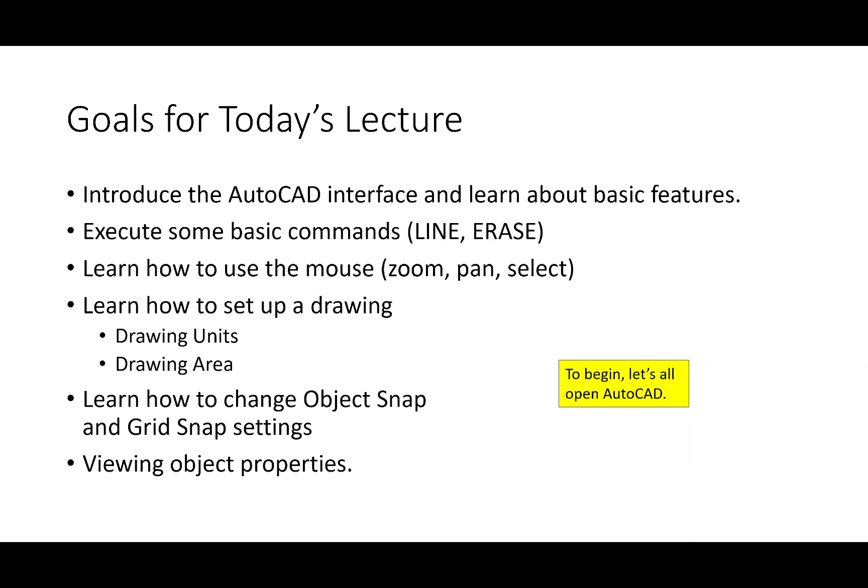So I'll say a few things here, and then I'll pull up AutoCAD. By the way, today I'm going to be hopping back and forth between the PowerPoint and AutoCAD itself, so I'll try and minimize that. I'm going to say a few things while you all have opened AutoCAD.

When you open AutoCAD, you should have this landing opening screen where you can create a new file, or see a list of all the files you've worked on before. If you've never opened AutoCAD before, there are about 3 sample files that show up with structural, mechanical, or assembly drawings. Those are just standard samples that come with the AutoCAD installation. As you work throughout the semester, you'll see all the files you work on. So why don't you go ahead and create a new file right now.

Just open it and click New. On Windows, you shouldn't really need to specify a specific type in that drop-down menu, but if you want, just make sure you select the one that says acad.dwt. That's just the standard template.

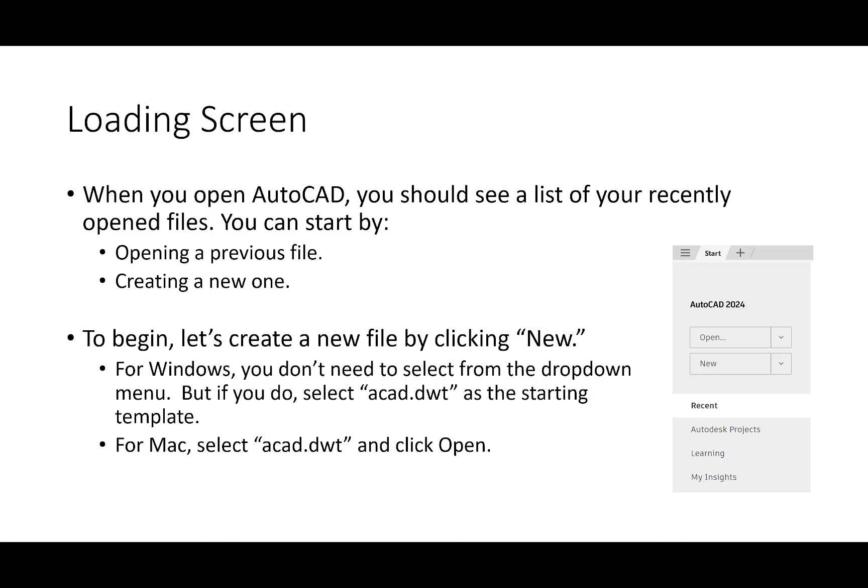I want to say a couple things about saving AutoCAD files, and this isn't really mentioned on the slide. I've taught this class before, and one of the tricky things is, sometimes it happens, you do have to save. That seems like an obvious thing to note, but these days a lot of the programs we use have autosave features where you don't need to think about it. For example, if you create Microsoft Office documents on OneDrive, you don't have to click save. It's like Google Docs, you don't have to save anything, it automatically does it. AutoCAD doesn't work that way. You have to actually save.

So if you're on an exam and I give you this big drawing to do, and you don't click save and you upload it, it's going to be empty, and I don't want that to happen. So please remember to click the save button. Save often during your work. I cannot stress that enough.

Now a little thing about the file structure in AutoCAD. Whenever you save a drawing, the drawing is what's called a DWG file, which stands for drawing. Whenever you save a drawing, if you open the folder on your computer, you'll see something like this drawing 07008, and an associated paired file called 07008.bak. AutoCAD automatically creates what's called a backup file. The way backup files work in AutoCAD is the backup is one save state prior to the drawing file.

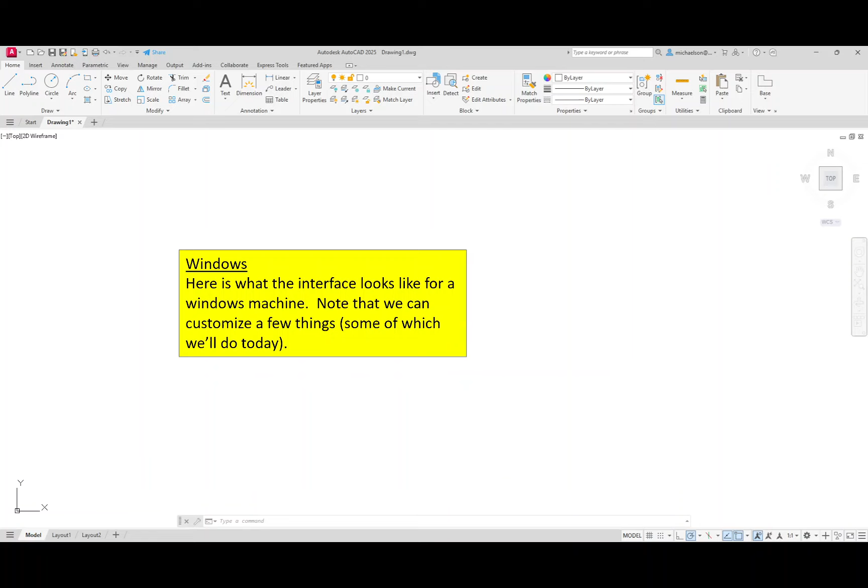The bulk of the commands are going to appear on the top of the screen. There's going to be a ribbon of commands, sort of like Word or Excel, where there's a tab with a series of commands. We're going to use that quite a bit. There's a command bar down at the bottom. You'll see a bunch of layout tabs and whatnot there on the bottom. This is what the Windows interface looks like.

The Mac interface looks like this. There's not a ribbon up top. Instead, there's a bunch of commands on the left and a bunch of commands on the right. The stuff on the right is related to layers and properties. The stuff on the left is really where all of your object creation commands and whatnot are.

So if you're operating via Mac, it should look something like this. Although you might have a dark theme on your screen and whatnot, it should kind of look like this. Does that make sense? Okay.

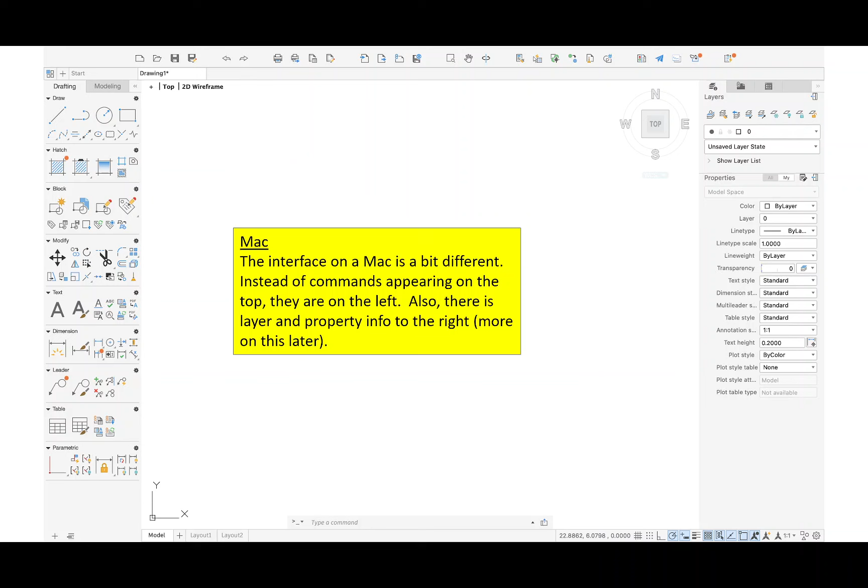Let me say a few things about the interface that's common, doesn't matter if you're operating Windows or Mac. The first thing I want to note is the command line. If you look at the bottom of the screen, you should see this rectangular bar where it should say something like 'type a command.' Does everybody see that? We're going to use that a lot this semester, okay?

The way AutoCAD works is that you execute commands to create a drawing. So what you'll do is say, I want to draw a line. You execute the line command, and you start drawing the line. Now, the way it works is you click the command bar, type the command, and press enter — but you shouldn't actually need to do that. If you literally just start typing right now, AutoCAD should recognize that you're trying to execute a command. For example, if you type the word 'line', you should see it pop up and recognize, oh, we're trying to draw a line here, okay?

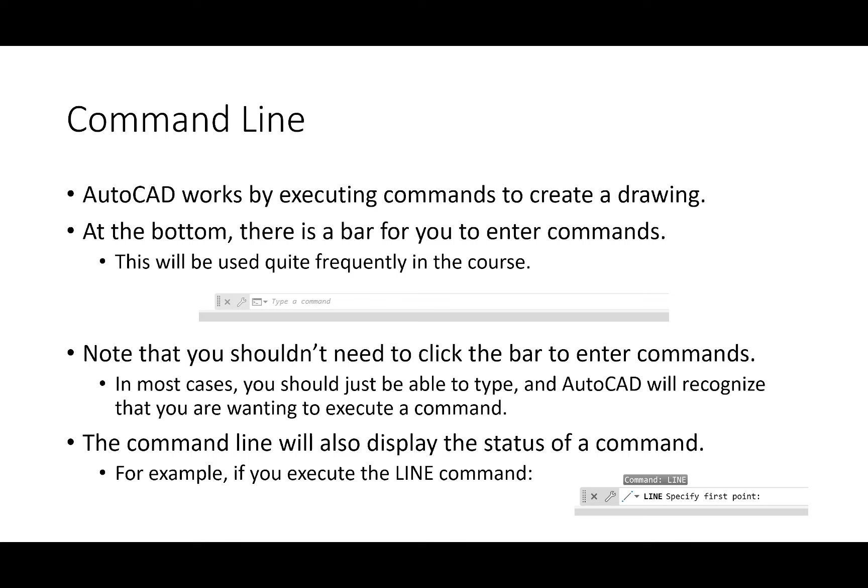We're going to do that here in a bit, but I just wanted to make the point on that. Okay, does everybody see on the bottom this 'Model' tab, and then there's 'Layout 1', 'Layout 2', does everybody see that? We're going to mess with that probably a little bit later in the semester if we have time. But those are referring to what are called model space and paper space.

To give you an idea, model space is where we're going to do the bulk of our work when using AutoCAD. So in model space, we're going to create the schematics and drawings for the given features. Paper space is a place where you can create printouts, okay? Now, I want to be crystal clear, you do not have to use paper space, and when we first start learning how to print, we're not going to. We're just going to print directly from model space.

The idea behind when you would use paper space is that if you have a bunch of stuff in model space — so you have one drawing — and from that one drawing file, you want to generate a bunch of sheets, right? So you would have a sheet, Layout 1, Layout 2, Layout 3. So a single drawing from which you're printing multiple sheets.

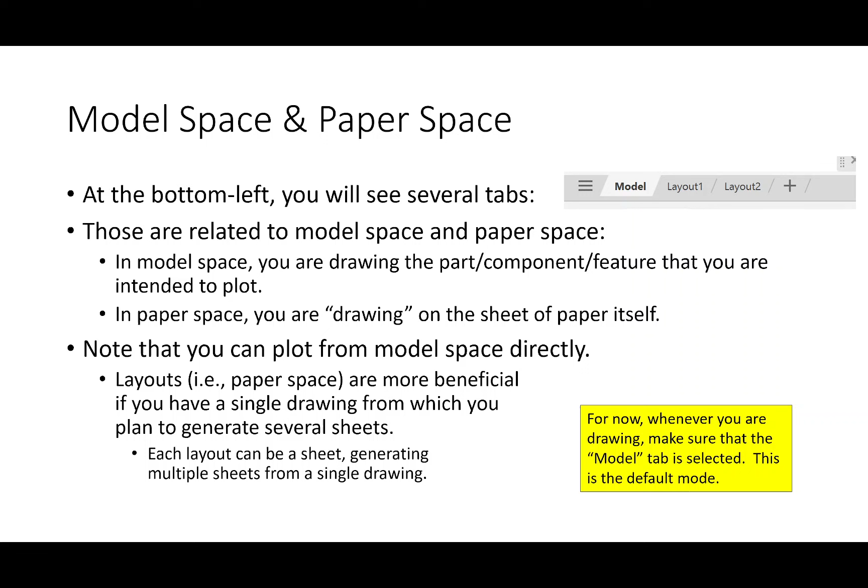That's where paper space really comes into play. We're not going to mess with that in the early part, but we might look at that a little bit later. For now, just make sure that whenever you're drawing, you're in model space, okay? You'll know when you're in paper space. It'll look different, and if you're in paper space, you're doing something wrong until I tell you otherwise.

All right, so let's talk about the drawing options and customizing the interface. We're going to mess with this a little bit later today, but this is the stuff on the bottom right, and Windows and Mac should see the same thing. This is the stuff where it says model, and it has these buttons and several features. We're going to dissect what each of those mean a little bit today, but everybody should see that. Understanding how these interface customization options work can save you a lot of time.

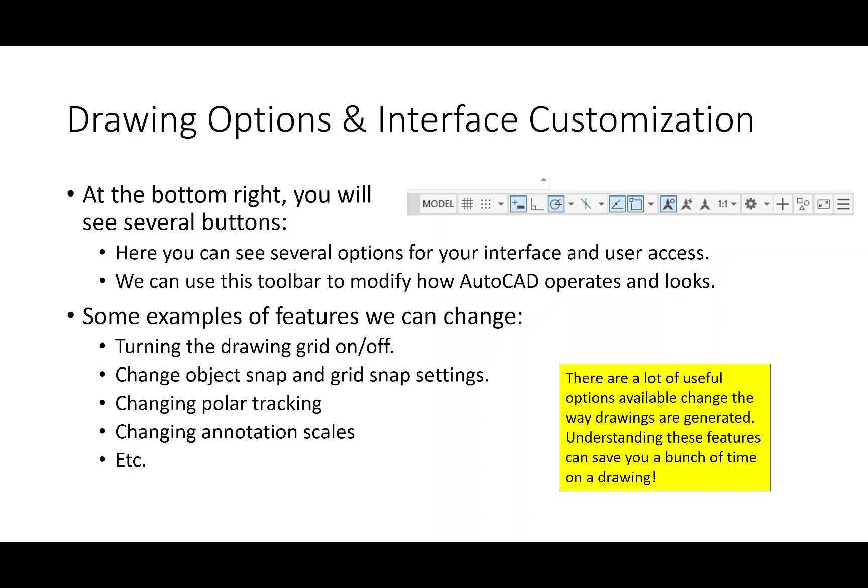For example, if you're trying to create a drawing at 1/4 of an inch increments, you can turn on grid snap at 1/4 inch increments, and now AutoCAD will automatically snap to that. You'll kind of see what that works like today.

One of the things I want to do is customize my interface a little bit, and I want to show coordinates. Let me show you how that works.

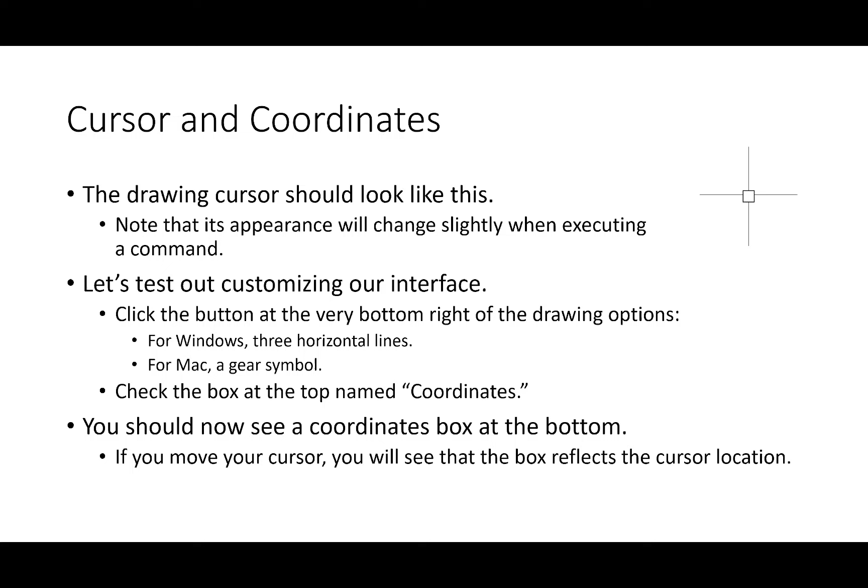Okay, so let's pull up AutoCAD here. Let me open up a new drawing. Okay, so here's my drawing. Actually, let me put me on the standard color scheme. Give me one second. Make it a little easier for everybody to see.

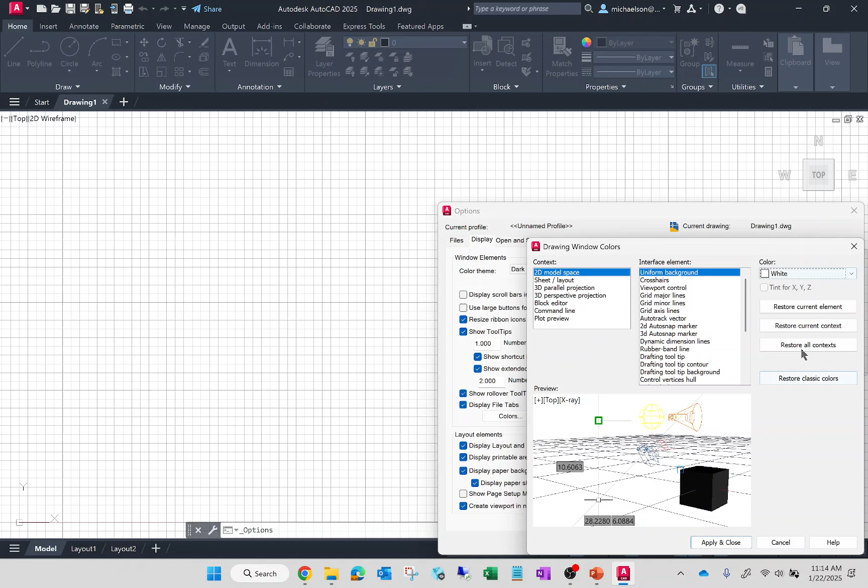Okay, if you look here at the very bottom, there should be these little three lines. I've heard computer programmers refer to that as a hamburger button because it looks like a hamburger. If you click that, there should be an option at the very top that says coordinates. I want you to make sure that that's checked. Now, if you've done that correctly, what you should see at the bottom now is this sort of readout.

See that thing at the bottom that has X, Y, and Z coordinates? As you move the cursor, see that? You can see the coordinates change. Does everybody see what I'm talking about? Here at the very bottom, we're talking about right here, this part right there. You can see the coordinates and whatnot pop up.

I want you to have that turned on throughout drawing. Trust me, when we start getting in the middle of creating our drawing, that's going to make life a little bit easier. You folks over here, I'm talking about this window right here. You're seeing that and did that correctly. So it's just one little thing that we can do to customize our interface. Sound good? Okay.

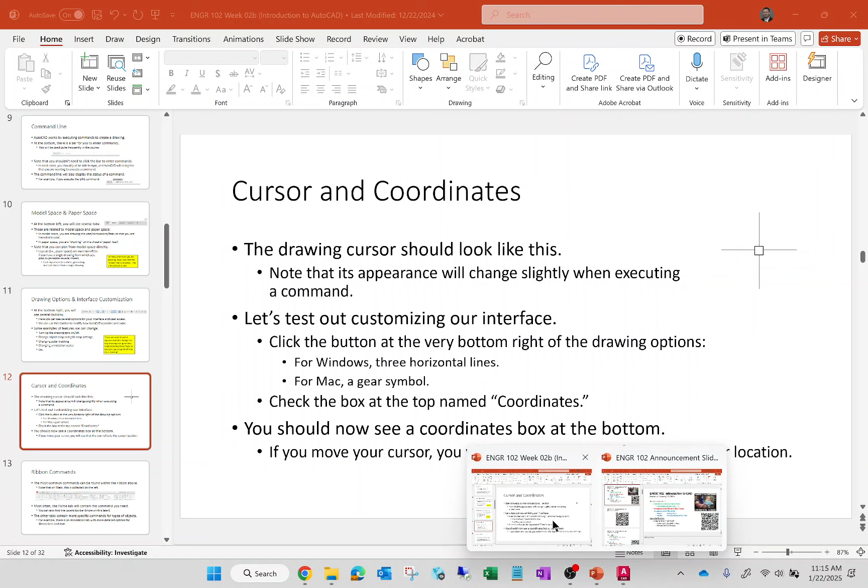So let's talk about the command. The ribbon on the very top contains the commands that we use to create objects in AutoCAD, like lines, circles, arcs, dimensions, and all this stuff. On Macs, these commands are collected on the left. For Windows, the Home tab, the very first tab, contains the vast majority of everything that you would need to create a drawing. It doesn't contain everything, so we'll need to do some annotations and use that tab, but for the Home tab, it should contain mostly everything.

For you folks using Mac, the stuff on the left contains the stuff in the Home tab. Macs are organized a little differently, and they actually are able to pack a lot more commands into a much smaller area.

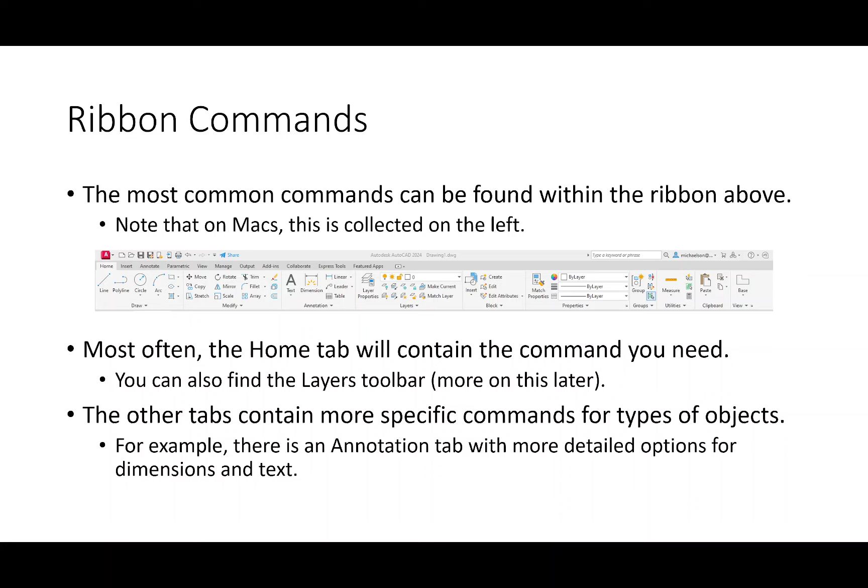But we'll use the Home tab and the Annotate tab. Those are probably going to be the two we use most frequently.

For you Mac folks, you really don't need to worry about this because this stuff already shows up. But if you look at the top left, there should be some icons for some basic commands, like new, open, save, save as, and all that.

One of the things I want you all to do is click the little drop-down arrow next to the share button, that icon that looks like a paper airplane. Next to that there's a drop-down arrow. If you click that, you should see an option that says Show Menu Bar. Click that, and then you can see the menu bar up top.

I really like having that visual because if there's any command that's not in the ribbon, chances are it's in the menu bar. So if we click that, now we can see File, Edit, and all that stuff. And again, for you Macs, you don't really need to do that because if you just hover to the top, you can see that it's there. Everybody good with that?

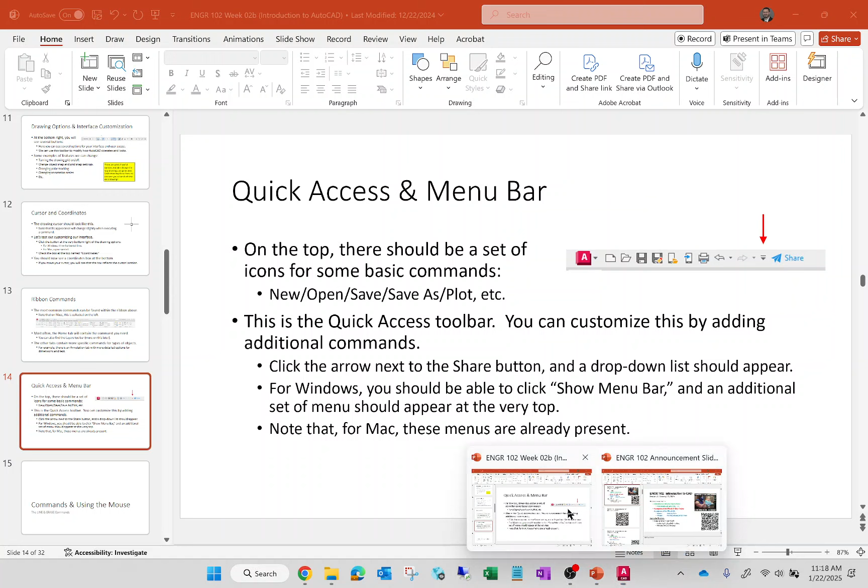All right, so we're getting to the good stuff here soon. I just want to make sure we're comfortable with the basics first. So let's get into some commands.

I want to make sure I throw some terminology out at you. We're going to be very terminology heavy, in terms of like, when I say objects in AutoCAD, it's going to have a very specific meaning. And I'm going to try and maintain that terminology throughout the semester. So if I get into definition land, that's why.

Throughout this semester and this lecture, I'm going to reference something called an object in AutoCAD. The best way I can describe objects is any feature in a drawing that can be plotted. By that I mean lines, circles, polylines, hatches, dimensions, text, annotation, all of that stuff. I say the term 'can be' does not mean 'must be.' There are plenty of objects we create in AutoCAD that we have no intention whatsoever to print. A good example of that is a construction line and whatnot.

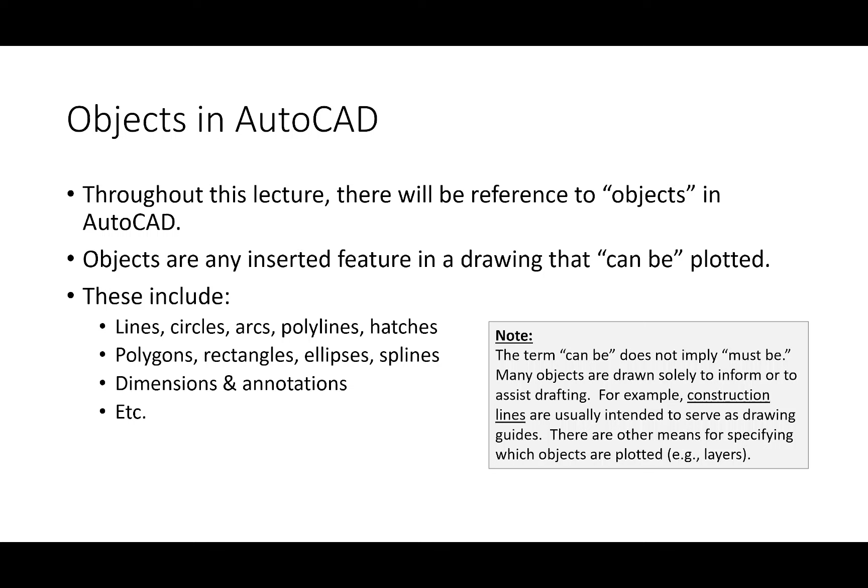The other thing we'll be able to do is create objects that we can turn on and off with what are called layers. We'll talk about layers in a couple weeks. But for now, if you need a definition for objects, that's what objects are.

Now, the way AutoCAD works is we generally have two modes of operation: navigation mode and command mode. Right now, everybody in here is in navigation mode, I think, where you're just sort of looking at the drawing, nothing's really running, but you can see what's going on. Whenever you execute a command, you'll know because you'll be typing out the command, the cursor will look a little different, and then you can start creating stuff.

So the idea is you'll execute a command, do a bunch of stuff, and then get out of that command to go back to navigation. You're either in navigation mode or command mode. If you're ever in command mode and you need to get out, press the escape key. The escape key is going to be your best friend this semester. You can hit it 150,000 times and you're never going to break AutoCAD. So if you're ever in the middle of a command and need to terminate it, hit the escape key.

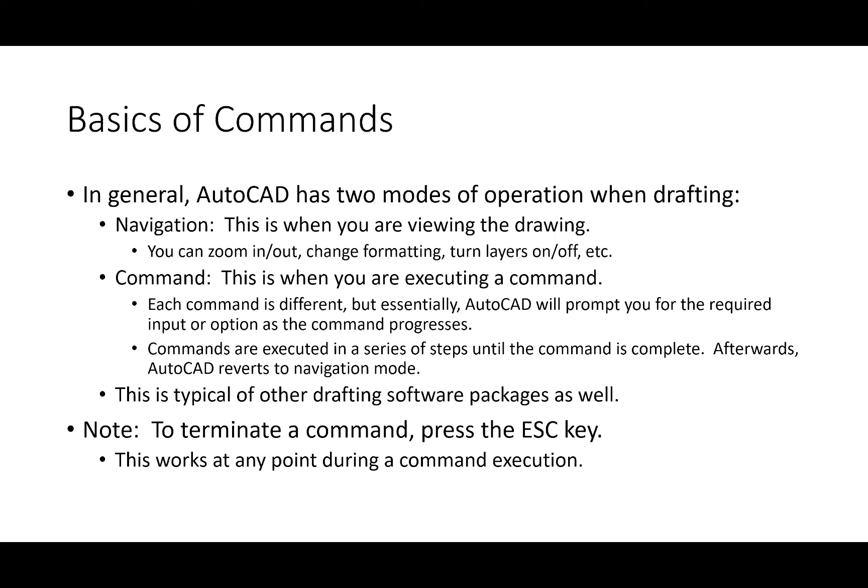Now the first command we are going to use is called the line command. I want to be clear right now, and we'll talk about this later, there is a difference between what's called a line and what's called a polyline. Now, we can do this a couple of different ways.

We can actually click the line button, or we can type out the command. I'm going to tell you right now, my preference is to type it out. Whenever I've worked in a professional setting doing this stuff, I found that drafters who are more efficient and can do things faster tend to just type the commands out as opposed to clicking them. So you can just type L and press enter and start drawing lines, whereas having to click the button actually takes more time. You might think I'm talking about a fraction of a second, but if you're working on a professional job, that stuff adds up.

Okay, so let's open up AutoCAD. Here's my interface, and I'm going to draw a line, or a series of lines. What I'm going to do is type the letter L and press enter, and you can see the cursor changed. You can tell you're in command mode because now the command bar at the bottom is asking you for some information. We're not going to specify any numerical data today, we're just going to play around with it a little bit. So I'm going to use the mouse and click a point. Specify first point, click right there.

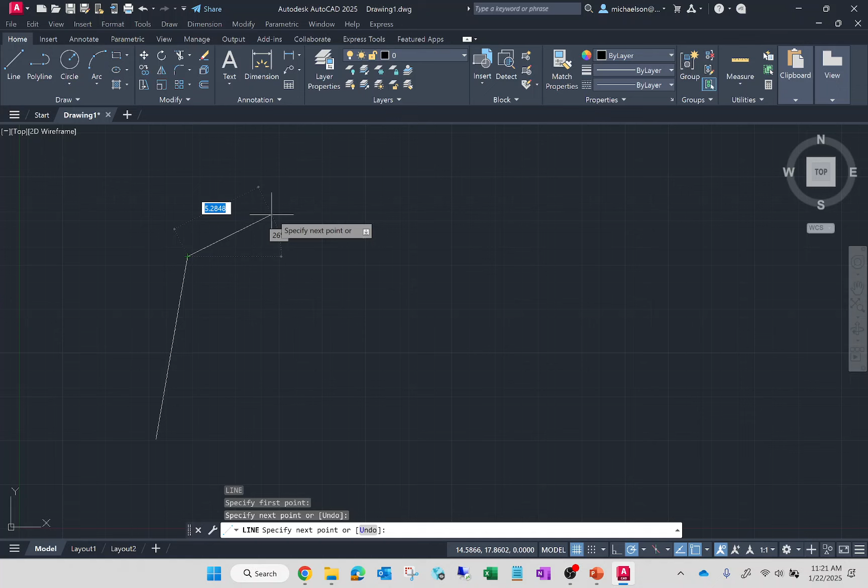Now you can see AutoCAD wants to start drawing a line. And as I click, it's drawing lines. So we can get kind of silly with it, okay?

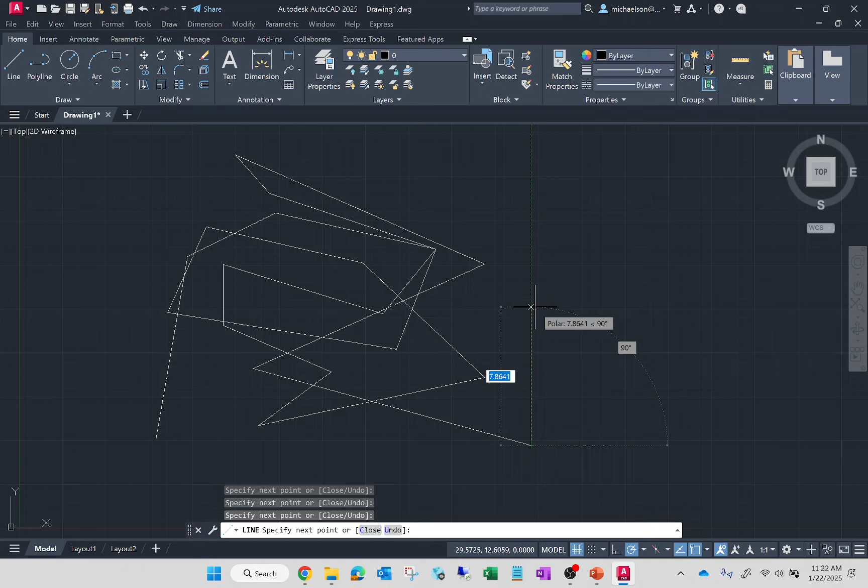One of the things you'll notice as you're drawing is there are a couple instances where AutoCAD's trying to help you along a little bit. For example, here I am drawing a line, and watch what happens as I try and draw a vertical - it goes, whoop, wait, you want to draw a vertical line. It's sort of helping you along. That's a polar tracking feature, and there are certain times where AutoCAD is trying to help you out. I didn't want that to concern you.

But we're just going to draw a few lines, and when we're done, you can hit the escape button to close out, or if you look at the bottom of the command bar, it says you can type the letter C or type close and press enter. Any of those will work. So I'm just going to hit escape, and boom, there's my line.

So the first thing I want to do before we move on is make sure everybody in here was able to do that. Is there anybody in here that was not able to draw some lines? Excellent, okay, that's what I want to hear.

Okay, so again, we will discuss the difference between lines and polylines later. The short answer is that I drew about 20 lines - AutoCAD thinks of those as 20 objects. A polyline, AutoCAD would think of that as one object. But we'll talk about that a little bit later.

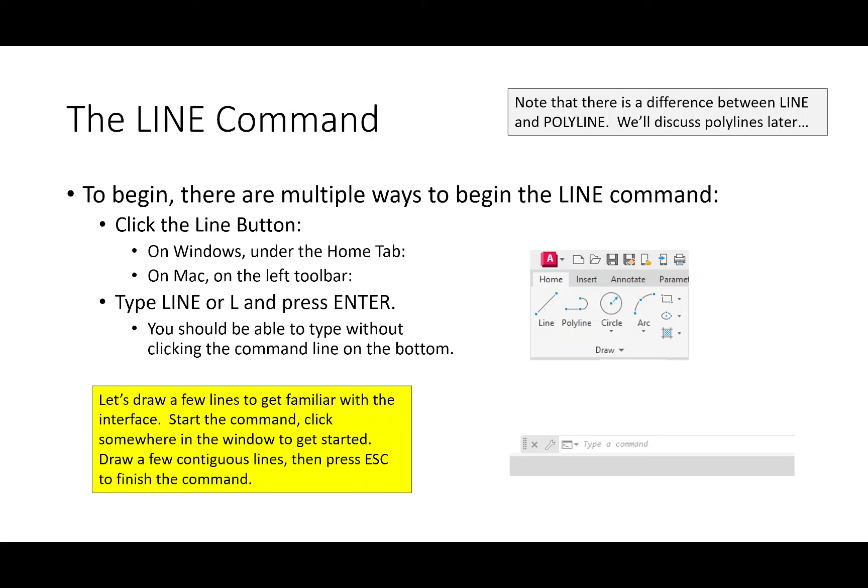Okay, so a couple things that you'll notice when you're drawing lines. As you draw, there should be some dynamic input that displays - things like the angles should display or the distances should display. AutoCAD is again trying to help you out.

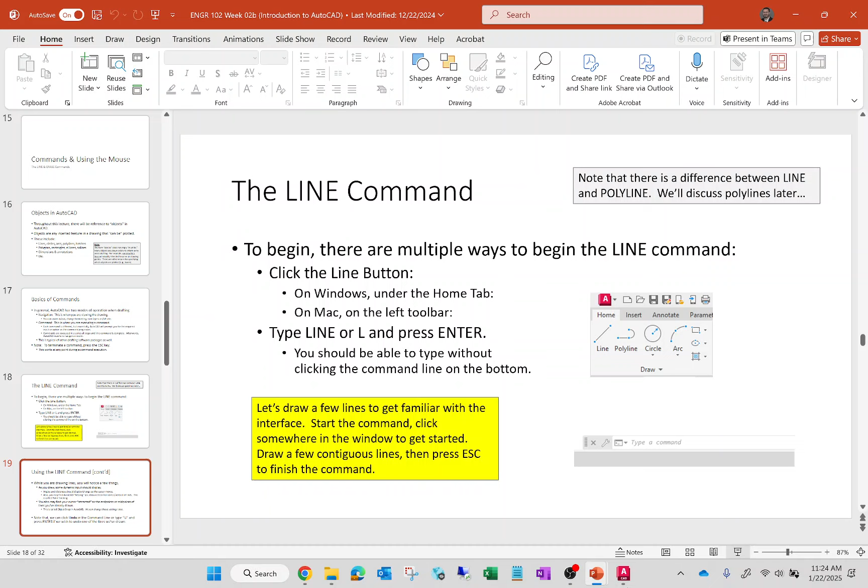One thing I didn't mention is that you might find your cursor attracted to certain geometric features you've already drawn. Let me show you that here in AutoCAD. For example, if I'm drawing a line, and I get my cursor close to here, you can see this little square pop up - it's trying to connect to the endpoint of a line I've already created. That's called an object snap. I'll talk about that a little bit later. That's entirely normal, and those are features we can change in terms of how AutoCAD operates. Everybody good? Okay.

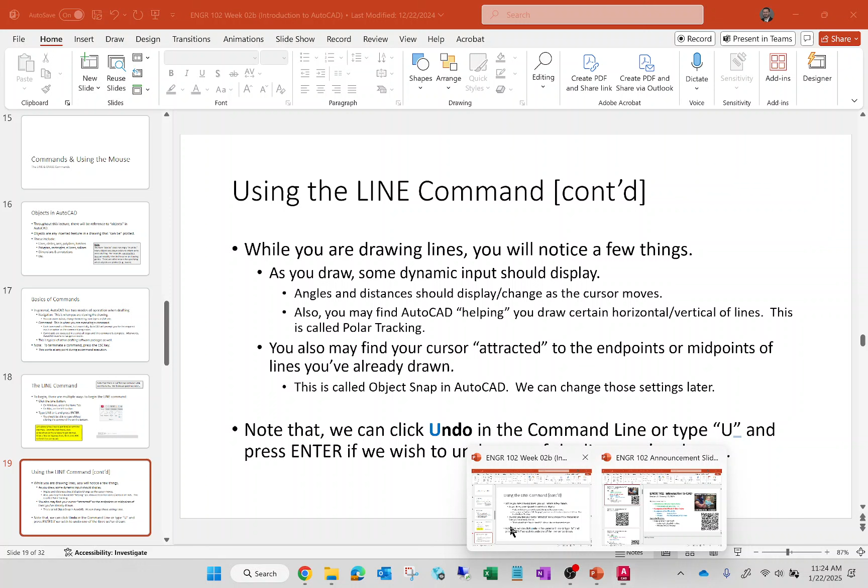And again, when you're drawing a bunch of lines, you can type the letter U in the command line and press enter to undo one of the lines that you've drawn. So if you drew 6 lines and line number 6 is wrong, just type U and press enter, and it'll get rid of that 6th line, and then you can redraw it. Sound good?

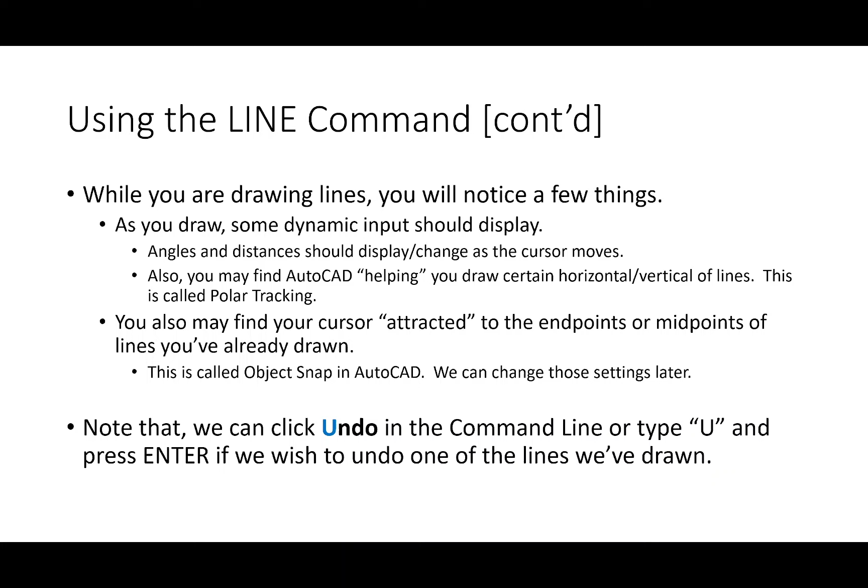All right, let's talk about using the mouse. The mouse really does make your life a lot easier. Some of you are already playing around with it, and that's totally fine, okay? So I want to say a little bit about what the different buttons of your mouse can do.

So let's talk about the left button. The left button can be used to select objects. You can single click an object to select it. You can single click away from an object to generate a window, or you can press and hold for a lasso. I'll show you what I mean there. So for example, I can click an object to select it.

I can drag a window, and some of you are probably wondering why the window is either green or blue. I can also click and hold and get this sort of lasso thing. I'll talk about that later. But that's what the left button is for.

The right button is pretty self-explanatory. If you right-click, it brings down a menu with additional options and whatnot. That's what the right button is for.

But what about the mouse wheel? The mouse wheel will allow you to zoom in and out. The way it works is it will zoom in and out, and the center of that zoom, the way AutoCAD is zooming, is a function of where your cursor is.

For example, here's my drawing. If I place my cursor right here in the middle and zoom in, you can see that's where it's zooming. But if I place my cursor all the way over here and zoom, it's zooming over there. Does that make sense? So where the cursor is affects where the zoom is.

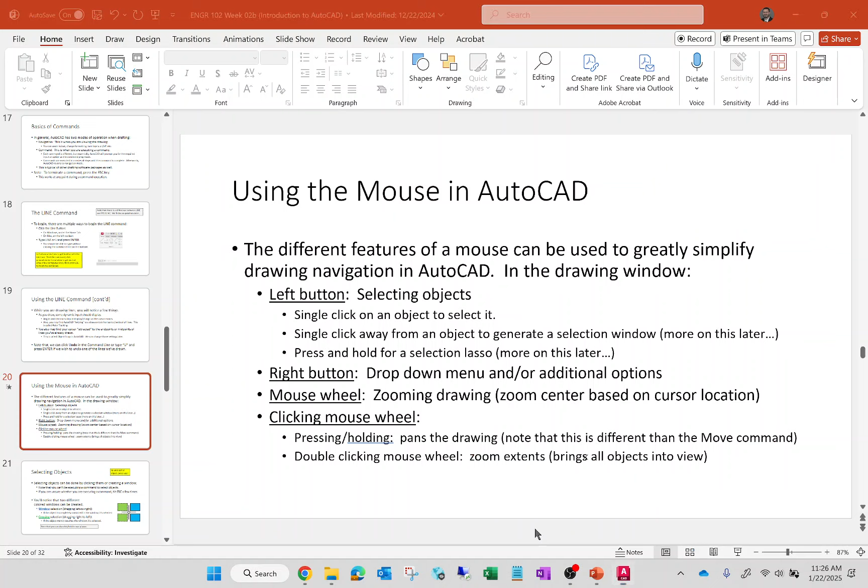In terms of actually clicking the mouse wheel, using it as if it was a third mouse button, if you click and hold, it does what's called panning. So if you click and hold, it's sort of like dragging the drawing around. This is not actually moving the objects, it's just moving where you are.

The difference between panning and moving is panning is sort of like what I'm doing. Let's say here's the table. Panning is just like me moving over here. It doesn't actually change the position of the table, I'm just moving over here. Moving is actually picking up the table and moving it. So that's the difference.

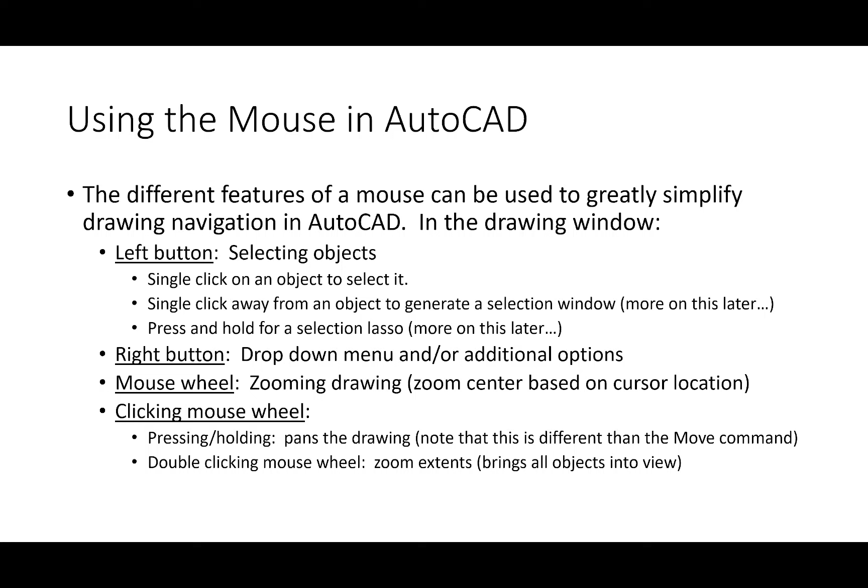If you double click the mouse wheel, like you would double click something, what it does is it brings every one of your objects that you've drawn into a single view. So if you double click it, you can see everything you've drawn all at once. It's an easy way of not losing something in that space, because your model space is infinite. You could go on forever in any direction.

As I said, if you drag a box, you've noticed it can go either green or blue. I tend to use this quite a bit when selecting, but to explain the green and blue: the blue is what's called a window crossing, or window selection, and the green is what's called a crossing selection.

The way it works is if you're dragging a window and the window's blue, and it could work whether it's a lasso or a window, it doesn't matter. But if it's blue, the entire object has to be located inside that window for it to be selected. Whereas if it's green, the window just has to touch that object.

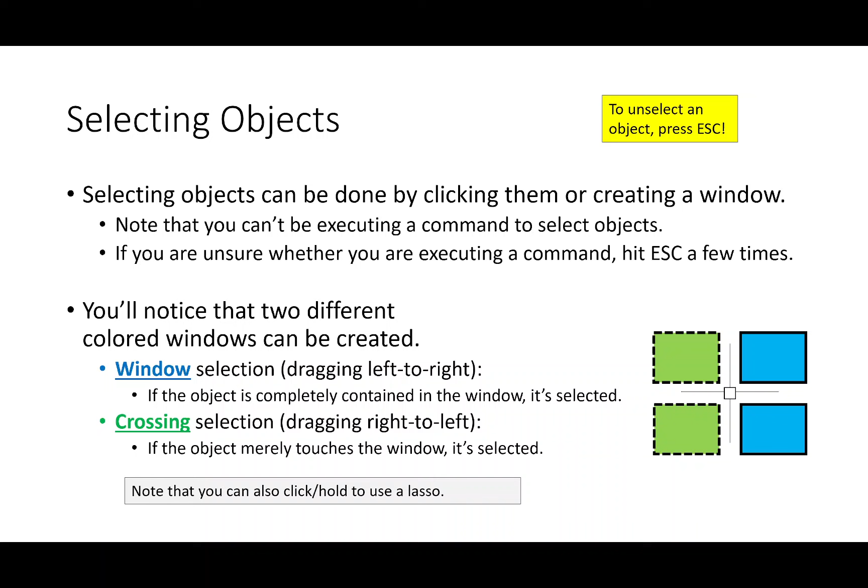Just to show you, here in AutoCAD is a bunch of objects. If I click, this is a green window, right? Notice this first diagonal line right here. The moment the box touches it, it selects it, okay?

But if the box was blue, notice how it's not selecting anything, because the only way blue works is if it encompasses the entire object. When I draw a box like this, notice how the only things it selects are those two lines up there because they're totally contained in the box. It's not selecting that third one because it's not totally contained. So green will select anything it touches, and blue will select anything that's fully contained in the window.

And the same thing works with the lasso. I'll be honest, I really don't use the lasso very much. Lasso features weren't an option back in AutoCAD 2005, which is when I started using it. So maybe I'm old school in that way, but I just don't really use it that much.

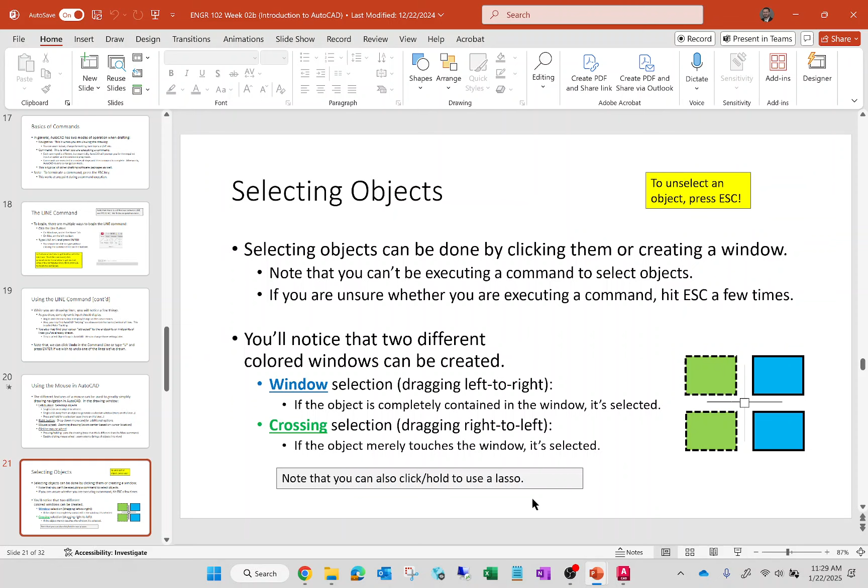Okay, let's talk about object properties.

One of the things you'll notice is that some of those properties you can actually change numerically, like picking an object and changing its X, Y, and Z coordinates, for one point. But some of those properties are changeable, and some are not. The ones that are not are grayed out. By the way, when it's grayed out, that means it's dependent upon other properties.

A good example of that is a line's length. You can't really change a line's length directly, because how would you compute the length of a line? Let's go back to algebra. If I gave you coordinate A and coordinate B, how do you compute the length of that line segment? Break out the old Pythagorean theorem, right? So you can't really change the length of the line, but what you can do is change this coordinate or that coordinate, and that will then affect the length of the line.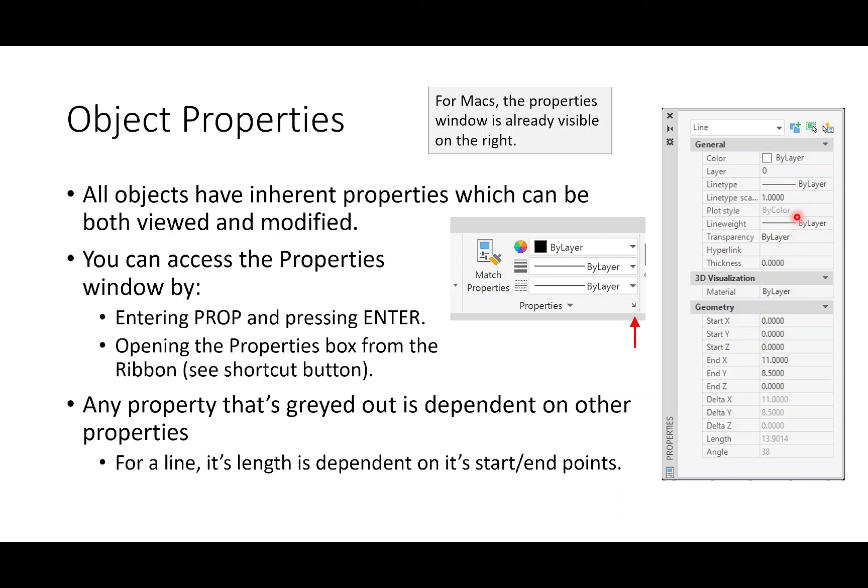Okay, all right, so the erase command. If the line command is the most common command that we use, I'd say erase is the second most common. You can click the erase command. However, the easiest way to erase objects is to just select them and hit delete.

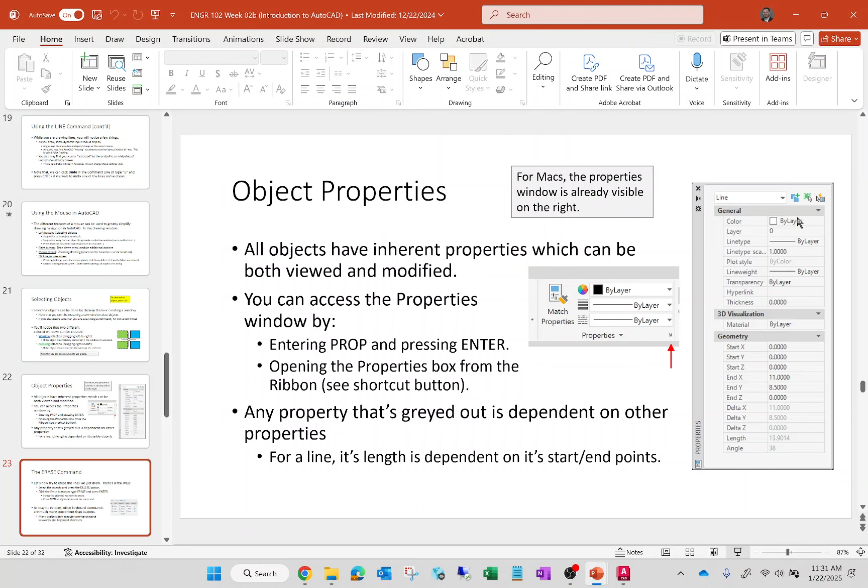So what I'm going to do is go into AutoCAD. Let's just select a few of these. Select these, hit delete. Really easy to do. We'll be doing that this semester, so I want to make sure we're all really comfortable with that really basic stuff.

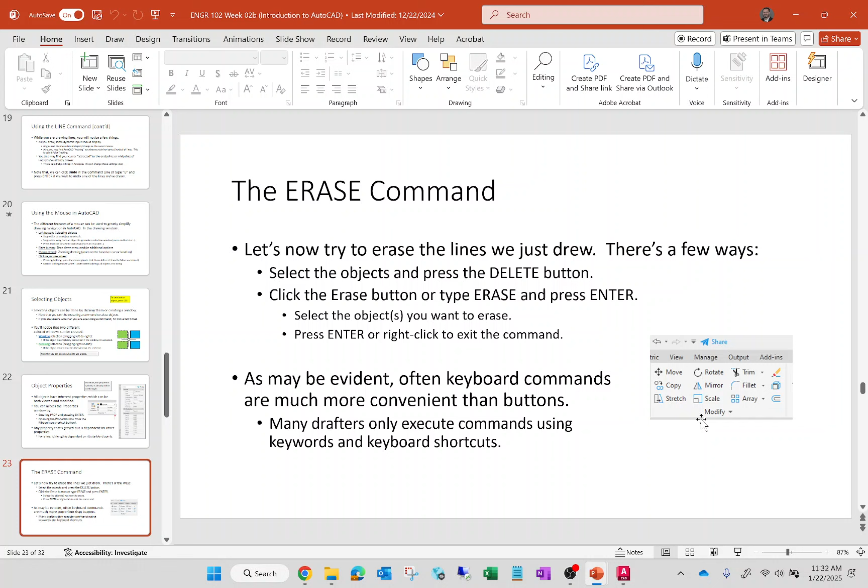As I mentioned, you could click the erase button. One way to erase objects is to click the erase button, select the object, press enter, and it will erase them. But it's just so much faster to select them and press the delete key on your keyboard. And I have found that the vast majority of professional drafters, folks that do this for a living, use the keyboard more often than not.

So much so that if you go to the Autodesk website, you can download this. This is the Windows one, this is the Mac one. I'm going to use the Windows one, although most of these commands are the same. There are so many common commands that you can literally just type one letter and press enter, and it will draft it. So for example, if you want to draft a circle, C, enter. If you want to draft a line, L, enter.

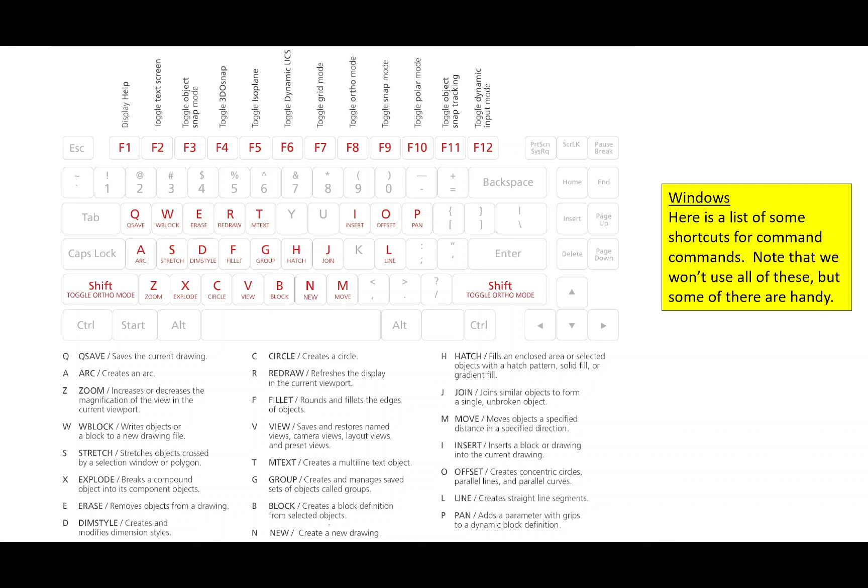H for hatch, things like P for pan, O for offset. Some of these I don't use very often, but line, circle, arc, I use those all the time. These are the Windows ones, these are the Mac ones. Most of the ones that are really common are the same in Windows and Mac.

There are some very slight differences, but the vast majority of the keyboard commands are the same for both. A lot of the tutorials I'm going to be generating this semester are heavy on that because they're just faster. I want you to be able to get these assignments done so you can move on to your calculus and chemistry and physics and all that fun stuff.

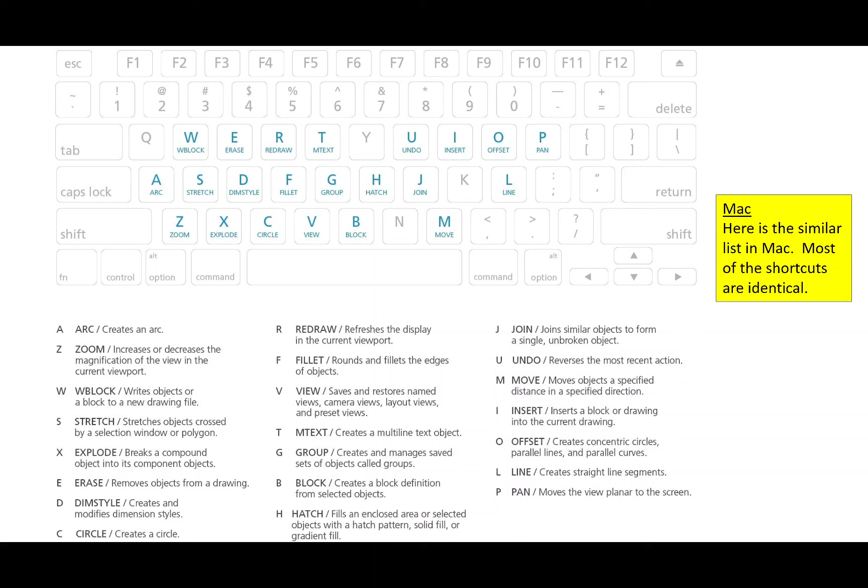So, okay, any questions? I've been rattling on a bit. I want to make sure everybody's following with me so far. This should be a pretty easy day, but I want to make sure everybody's good. Any questions?

Let's talk about setting up a drawing, because we just went into the drawing and sort of went to town. But typically what we'll do before we even start creating objects in AutoCAD is set the drawing up.

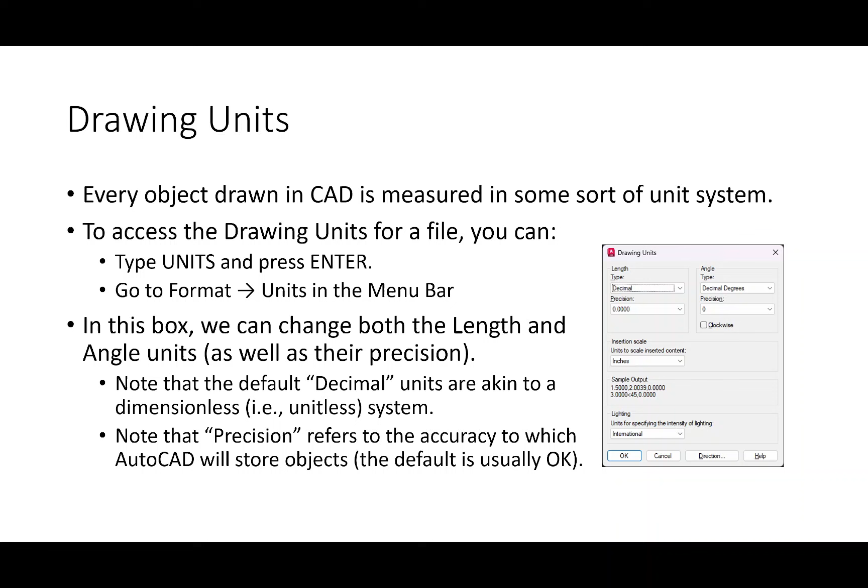The first thing we'll do is set up units. We'll go into AutoCAD, type units, and press enter. That brings up a dialog box where you can specify the unit system you're going to be using.

The default unit system in AutoCAD is called decimal units, which, to be honest, just means no units. AutoCAD just thinks you drew a line that is 4 units long. It doesn't assign 4 meters or 4 feet or something like that.

You can go in and change that. You could say I want these in architectural units or engineering units. What I tend to tell first-time drafters is that if you need something in feet and inches, the architectural unit system makes more sense. Otherwise, I'd probably leave it in decimal and just adopt a consistent unit system. That's probably what I would do.

The one thing I should mention is precision. AutoCAD adopts a standard 4 decimal precision, so any objects you create can guarantee precision up to 4 decimal points. For the vast majority of engineering schematics, that's probably fine. You can change that if needed, and I'll tell you if we need to. Otherwise, that 4-point decimal precision is probably just fine.

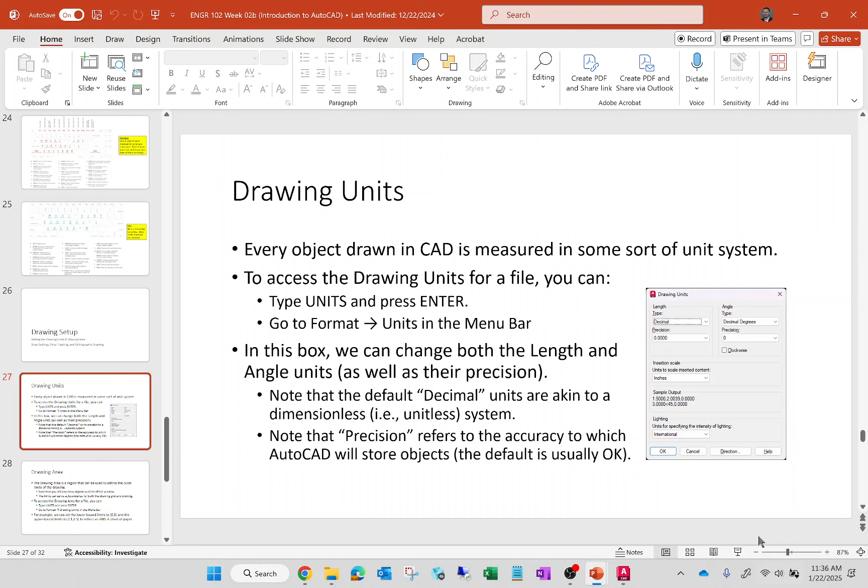So far so good? Okay, now let's talk about the drawing area. Right now we've just been drawing things wherever we want. What I want to do is define a drawing area, which can be used to define the limits for the drawing. I'll admit this won't matter a whole lot now, but drawing limits can be a very useful tool for plotting.

Here's an example: we'll set drawing limits from the point 0,0 to the point 11,8.5, and we'll say those are the drawing limits. Then we can tell AutoCAD to plot everything within that box on an 8.5 by 11 sheet of paper. Does that make sense?

Now, can you draw objects outside those limits? Yes, you can. There's nothing that says you can't draw anything outside those limits. Setting the drawing area, setting the limits for the drawing, is primarily a feature you'd use for plotting.

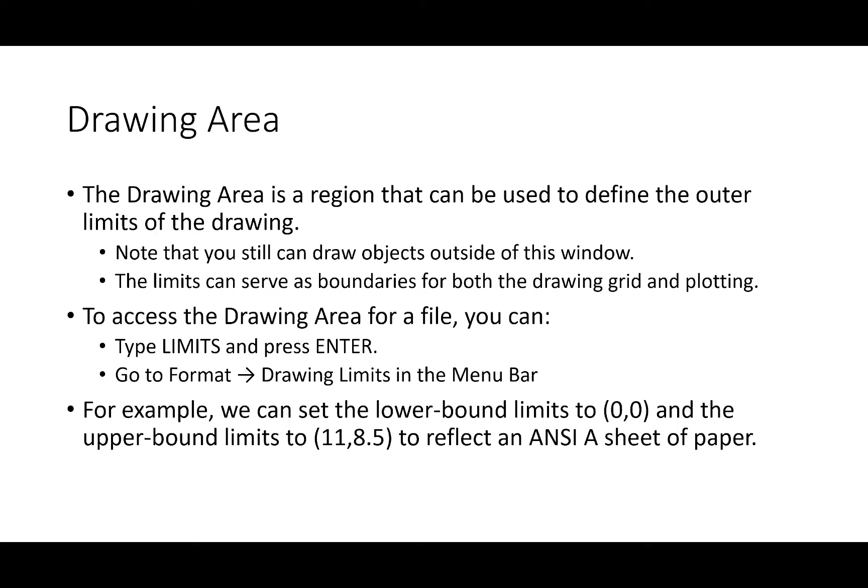Now let me show you how you would do that. You would just go here and execute the command - we'll say limits.

Then it says specify the lower left corner. Here's something about AutoCAD command structure: if you look at the very bottom, it says specify lower left corner, and inside the bracket it shows 0,0 - that's the default value AutoCAD already used. So I'll go ahead and say 0,0, then down in the command bar say 11,8.5.

Another reason I wanted you to execute that command is I wanted you to get used to typing out the values, as opposed to what we did with the lines, just drawing a bunch of lines. In later exercises we're going to need to specify coordinates, lengths, dimensions, and so on, so we need to get used to doing that. So far so good?

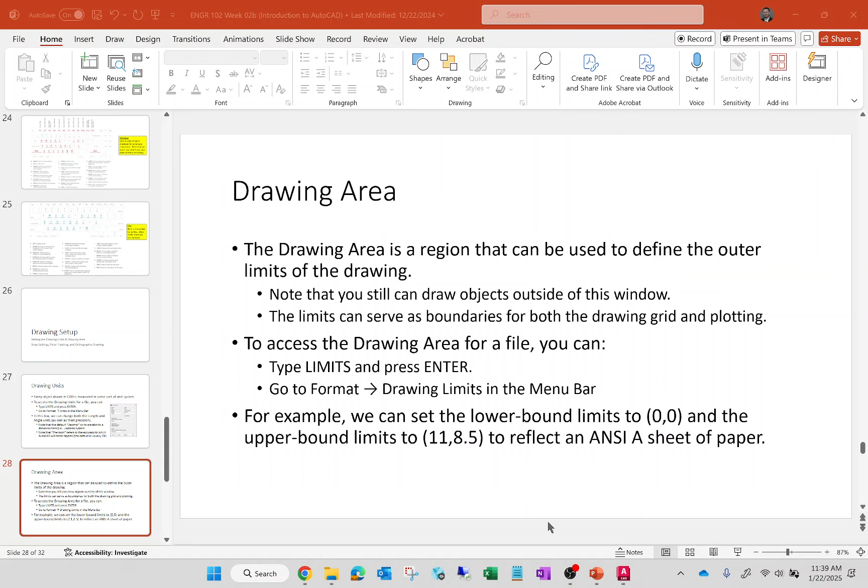Okay, let's talk about the drawing settings and the grid settings. This is, I think, when you're first starting to use CAD, a really powerful way of making sure that AutoCAD is doing what you want it to do.

So what I mean is, if you want to draw a line that's exactly 2 units long, if you don't have your snap settings done correctly, sometimes that unit isn't 2 units long, it's 2.001 units long. Add that up over a big drawing job, and suddenly everything doesn't fit together and it's driving you nuts. Setting your grid snap is a way of counteracting that.

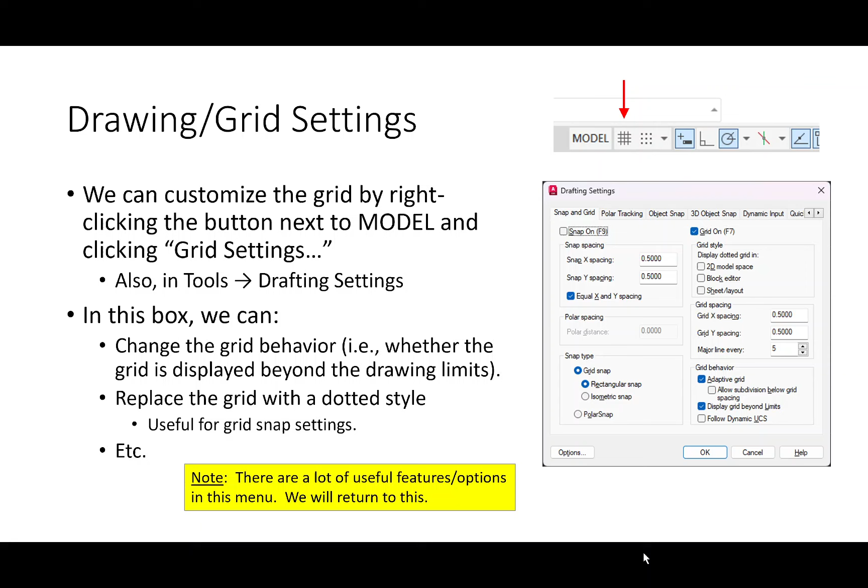Let me show you how that works. I'm going to delete all this, and let's go into our snap settings. I'm clicking this drop-down area right here, and going into snap settings right there.

Okay, what did I have here? This is why I printed out my slides, so I didn't have to keep going back and forth. Let's turn our snap on. Notice how many of you have your default set to a half inch or a half unit in either direction? Let's change that to a quarter inch, 0.25 in either direction.

And then the other thing I'll do is, on the right side, where it says display dotted grid, I'm going to check the box that says 2D model space, and hit OK.

Does everybody see what changed? How many of you got the dots that showed up all over the place? Everybody see that? Anybody not see the dots? Good, now watch what happens when you draw a line.

Let's draw a line. Let me zoom in a little bit. See what's happening? Does anybody see it with your cursor? See how your cursor's jumping around and won't click anywhere between those spots? Does everybody see how it's sort of attracted to those grid points in between?

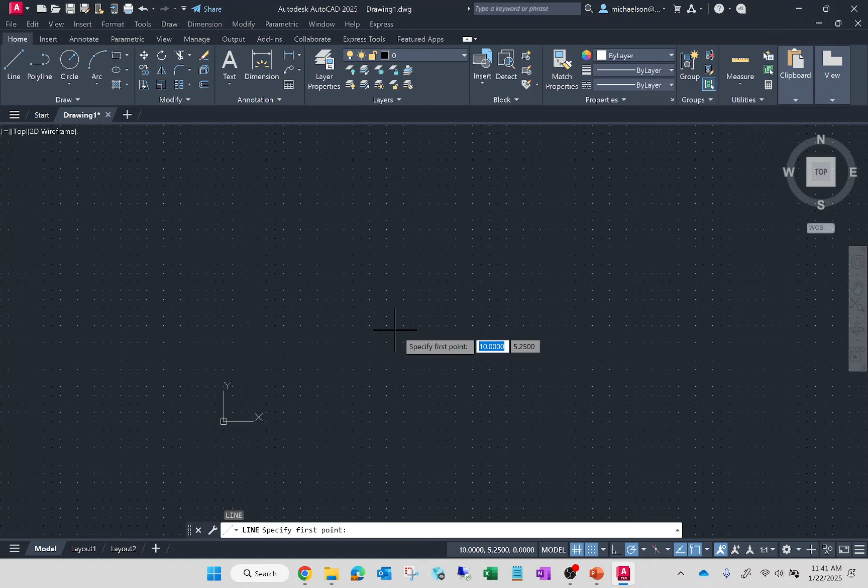So what we did is we told AutoCAD to only draw lines in 0.25 increments. It's a really powerful way of making sure the lines are the length they're supposed to be. Make sense? Okay, and then you can click.

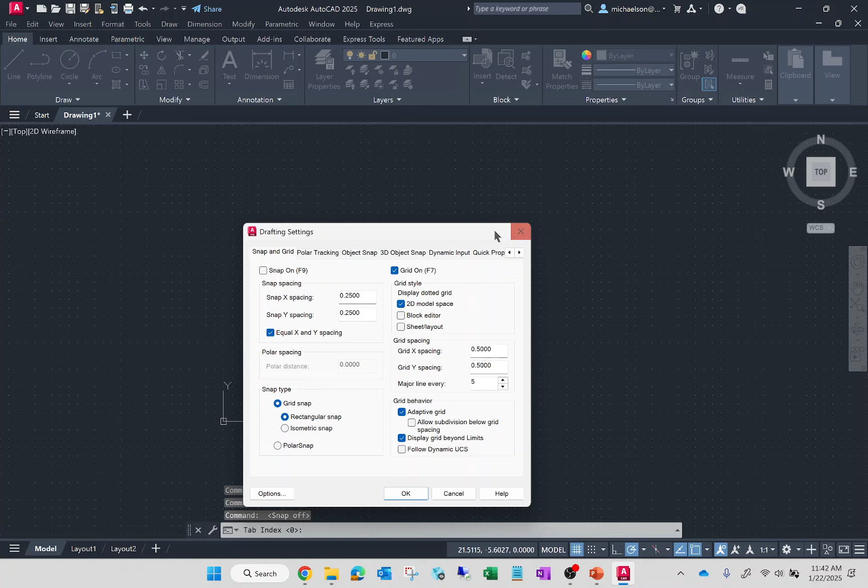Just click the little button here to turn it off, or go back to the window and turn that off. And boom, there we go. Pretty straightforward. I'll turn my drawing grid back on. There we go.

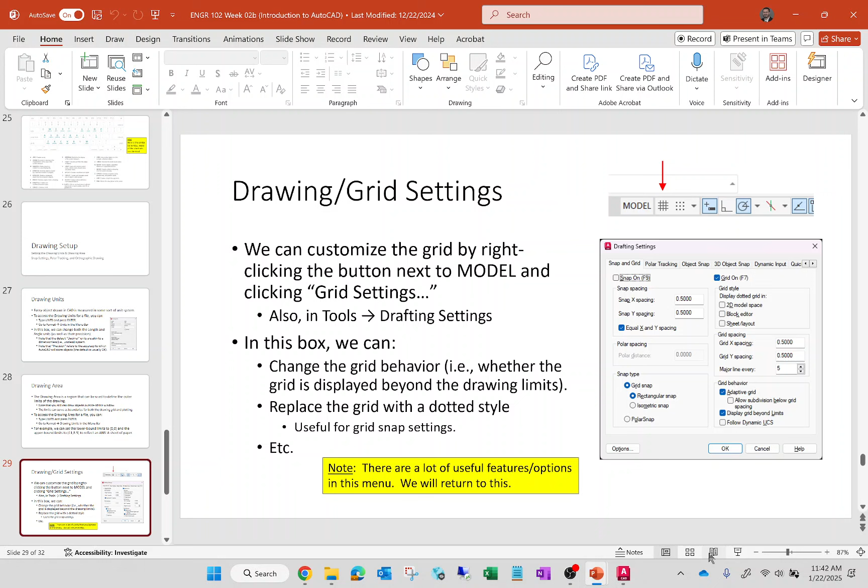So again, we'll use a grid snap for our first couple of assignments in here to make sure everything is going the way we want it to. All right, I do want to talk about object snap.

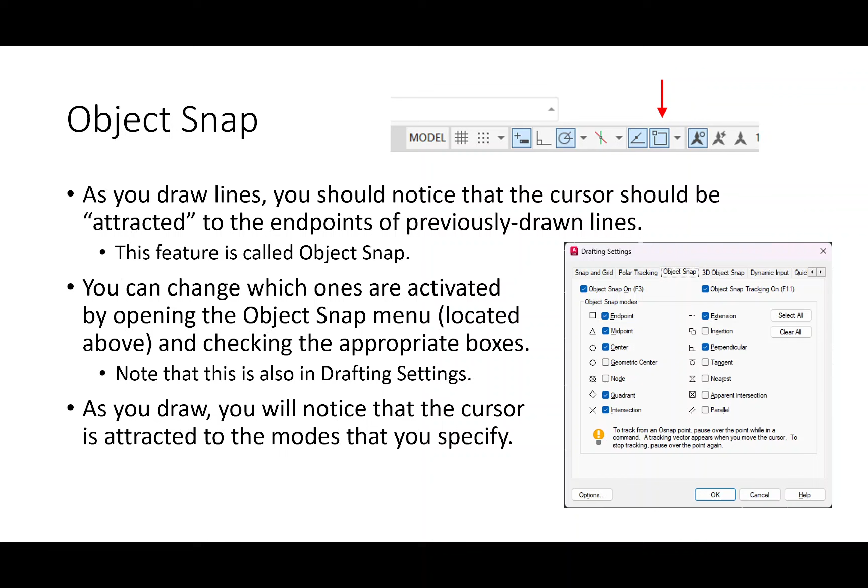Object snap - let me draw a few lines to go back to that. So draw a few lines. Now when I draw another line, let's draw this right here. Object snap is when it's trying to snap to a given feature inside AutoCAD.

AutoCAD has a very accepted legend for what those snaps are. Notice how right now it's trying to draw a line and attract to the endpoint. Everybody notice the symbol? It's a square. Whenever you see that highlighted square, that corresponds to an endpoint.

Now here's something else. Let's draw right here. See how it's a square for an endpoint? Right there, does everybody see how it's like a triangle? That's for the midpoint. AutoCAD has a very accepted schematic for what those object snaps are.

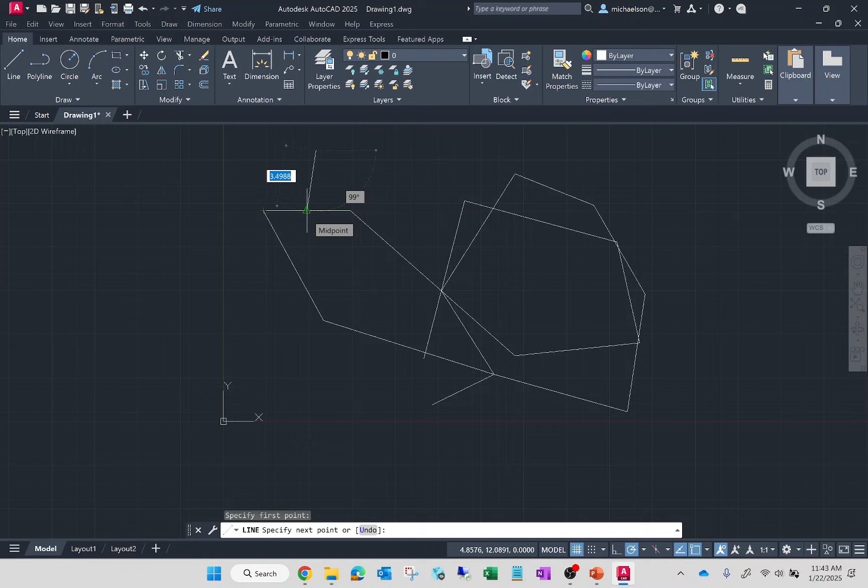Now what you can do is, let me hit escape. If you look right here, you can notice I've got a few objects selected that I want AutoCAD to snap to. The more objects you select, the more AutoCAD will be attracted to, which can be good and bad. The good side is it'll find all the features you're looking for. The downside is if you have a really dense drawing with a lot of objects, it can get a bit unwieldy.

So usually, in my practice - and again, this is your preference, you can do this however you want - I tend to use endpoints, midpoints, centers, and intersections. Extensions sometimes, but really I don't use a lot of the others unless I'm doing something very specific. But for example, just to show you how this works, let me draw a circle.

So here's a circle. If I draw a line, you can see there's the center. But there's one feature that I can snap to called a quadrant. And if I click the quadrant, now you can see that's sort of the north, south, west, east of the circle. AutoCAD is using this sort of four-point diamond as a quadrant. Again, you can mess with that and play with that as much as you want. Everybody okay with this?

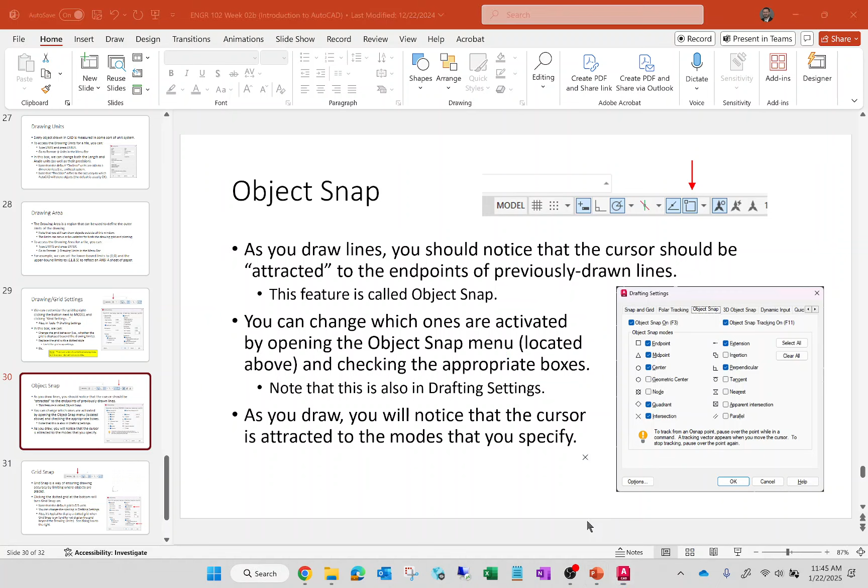Okay, trying to think if there's anything else I had here in my slides. So, grid snap, I already talked about this, but this was where we could change the grid units and display that in the model space.

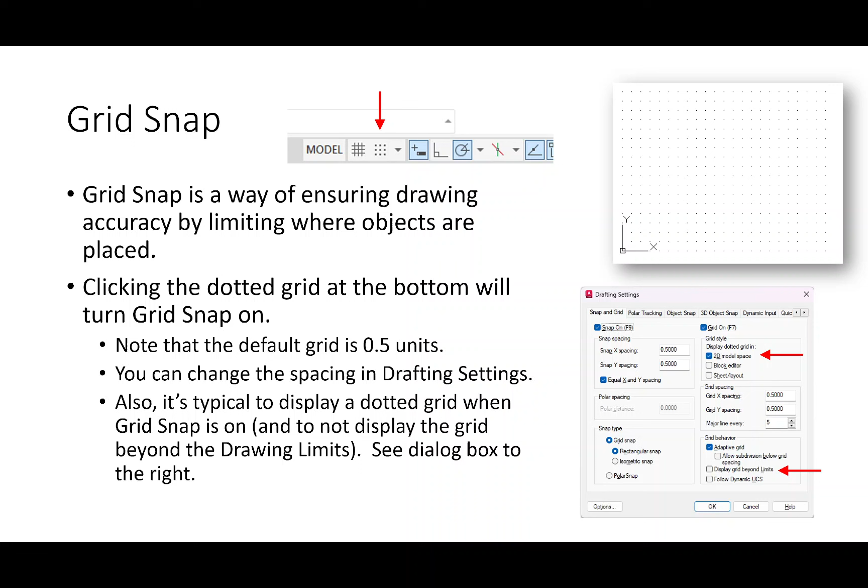Let's see, oh I know what I wanted to show you with that. So if we go back to the drawing grid, let me go back to this. This is what I want to show you. So we'll turn on that 2D model space grid, but if you notice right here, see where it says display grid beyond limits? You see that?

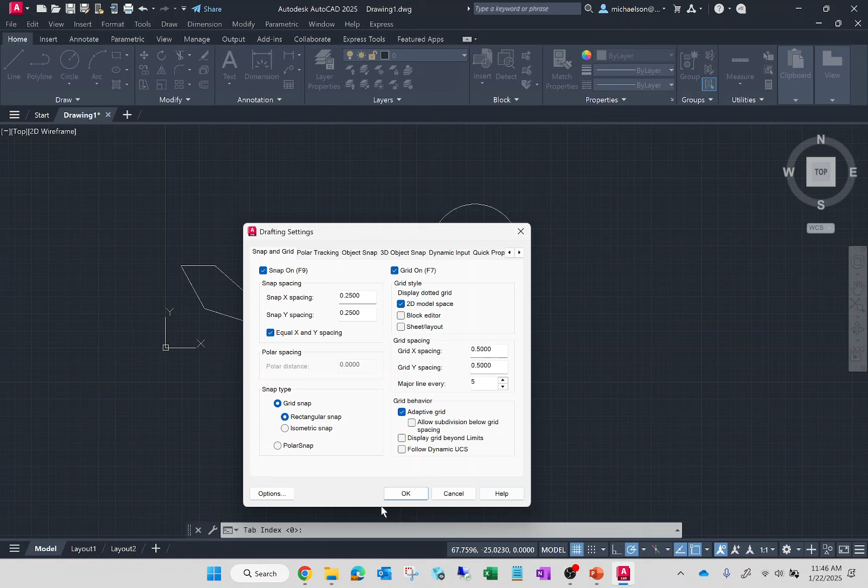So I went back to the grid settings, and I'm saying okay, let's display the grid beyond limits. Let's uncheck that. So if I uncheck that, hit OK, now it's only displaying the grid in the very bottom. That might be kind of tough for you to see with the lighting and whatnot. It'd probably be easier to see on your screen, but maybe what I'll do is turn these off real quick.

And where is it showing? Where we defined the limits earlier. So just wanted to throw that out there.

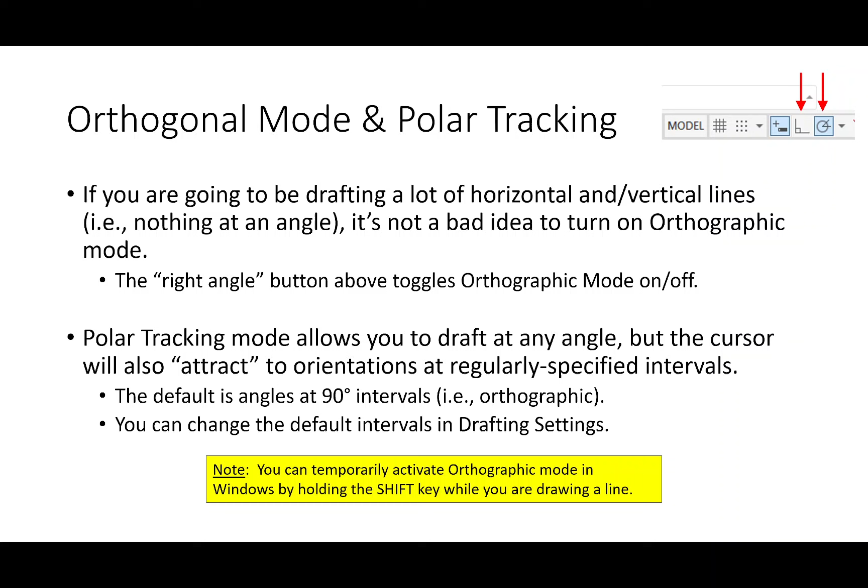The last thing I'll show you, and then we'll call it for the day, is these options down here for orthogonal mode and polar tracking. If you look at the bottom, you'll see this image that sort of looks like a right angle. If you turn that on and then start drawing lines, you'll notice that it will only draw lines up, down, left, right. So for example, right now, draw a bunch of lines, turn on orthogonal mode with this right angle, and it will only draw up, down, left, right. It will not allow me to draw an angled line.

And so this could just be another way of exercising control over the schematics that you create. I threw a lot of interface stuff at you today, but the idea is that I just wanted you to get comfortable with the interface so that when we start learning how to create objects, we sort of understand this stuff. Okay, a couple housekeeping items before I close. Does anybody have any questions?